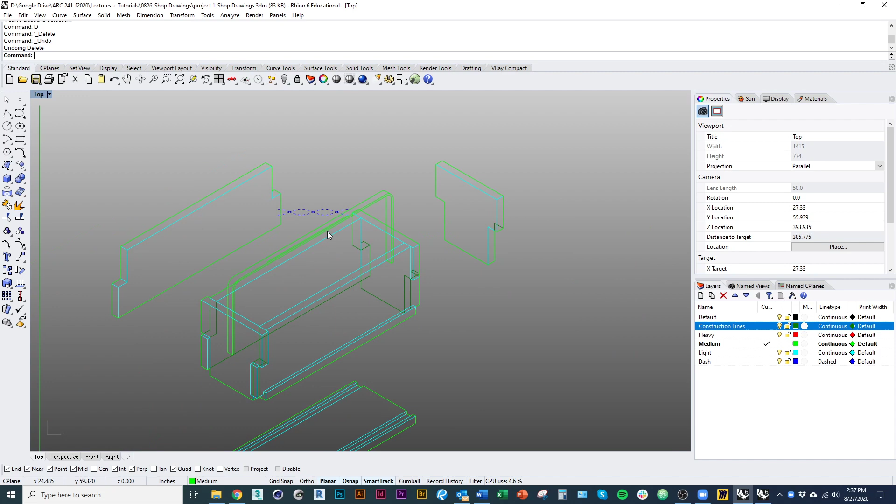This line is the center line of my handle, the center axis. That was the line I drew first, and then I offset everything. This central segment, this 8 inches right in the middle of the handle, is where our twist is, so that's where I need to apply this part of the drawing.

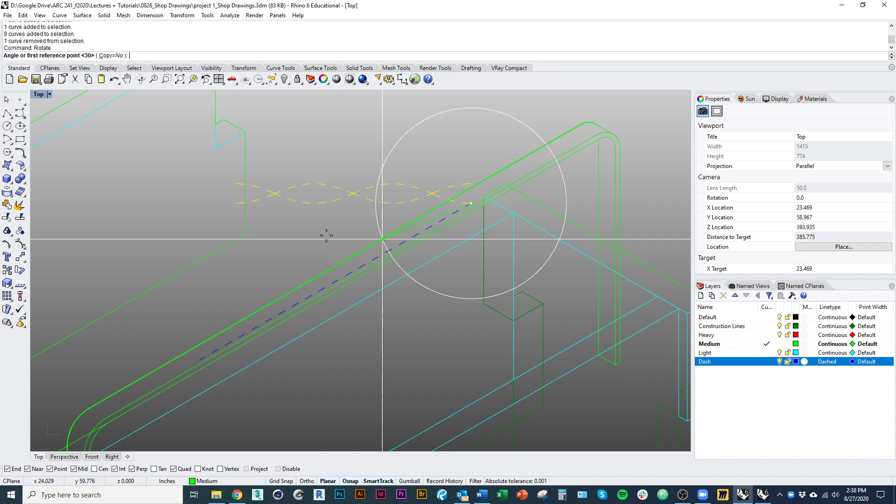So I copied it from our plan down below, and I want to move it up so it's snapped to the end of my axis, and then rotate it. I'm snapping the center point of rotation to the start point of the axis.

Shift, and I'll just rotate it so it's aligned to that axis. Now I'll select those two sets of lines and isolate them. The isolate command works like hide, except it hides everything except what you're selecting, so now we're just working on these two curves.

So what I want to do first is Scale1D again on this set of curves, and I'm going to line them up with my central axis.

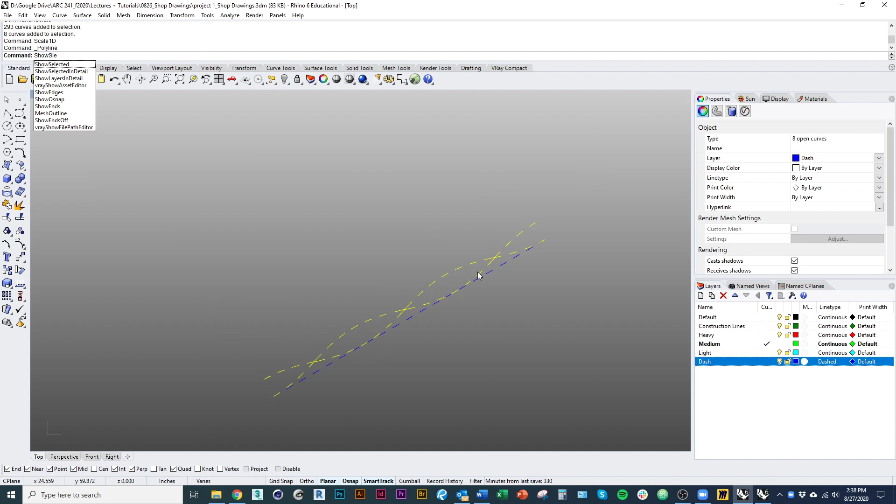Next I'm going to kind of shear it. Let me do show selected to bring back some of these lines here - those are the lines of my handle. You can see the angle of my axis is a little off from the angle of that line.

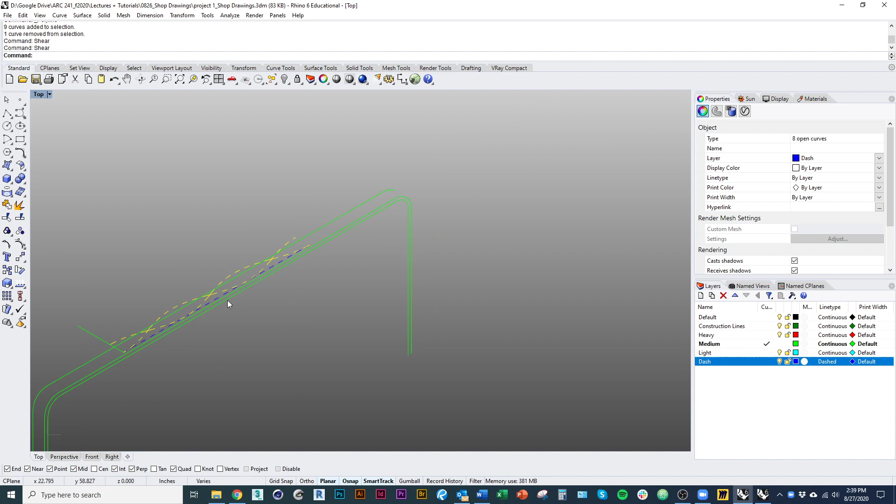So I'm going to use the shear command to line it up according to the isometric angle. I'll select those curves, type shear in the command line - oops, wrong point. We're going to snap to that corner, then drag it down to that construction line, which is at 30 degrees. Now it matches where it should fit within that handle, so I'll move it over within the handle.

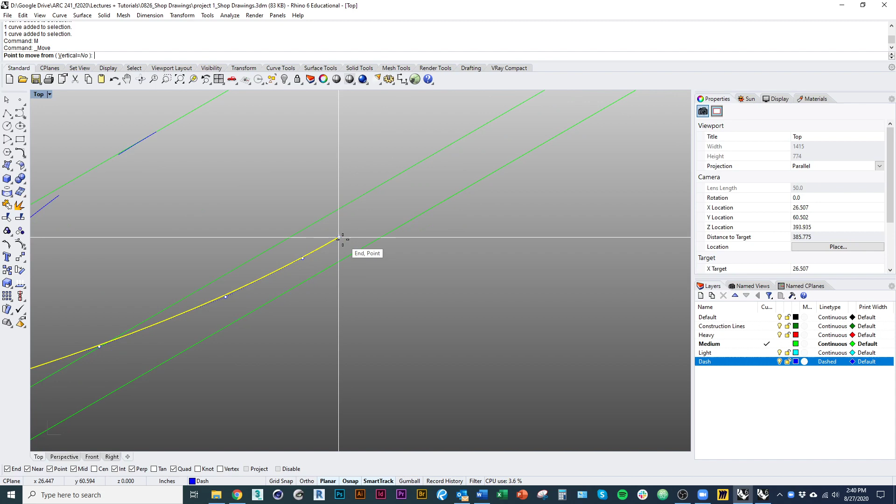And then I'm just going to move these lines. Actually, let me draw this out properly, kind of go like that. Okay, and then I'm just going to trim everything else.

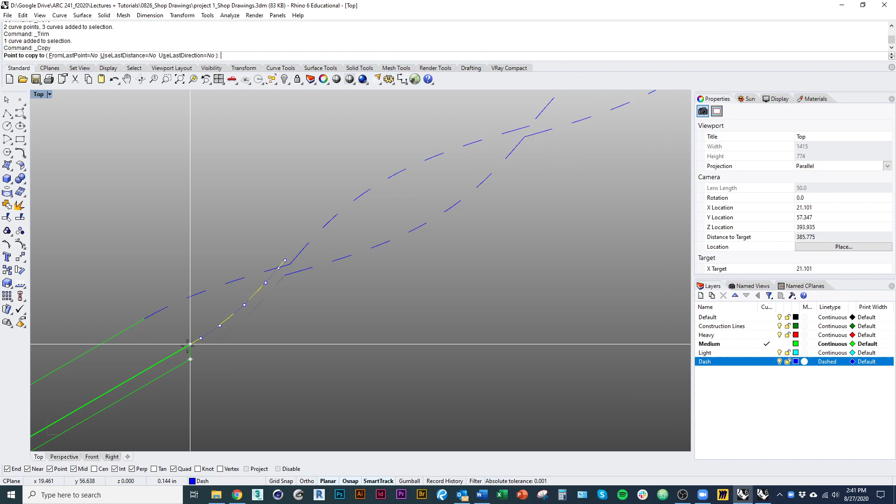Just like we did earlier. Oops, did that work? Good. Okay, and then I'm going to copy a couple of these lines here. Right, and that should be just about good enough for what we're doing now.

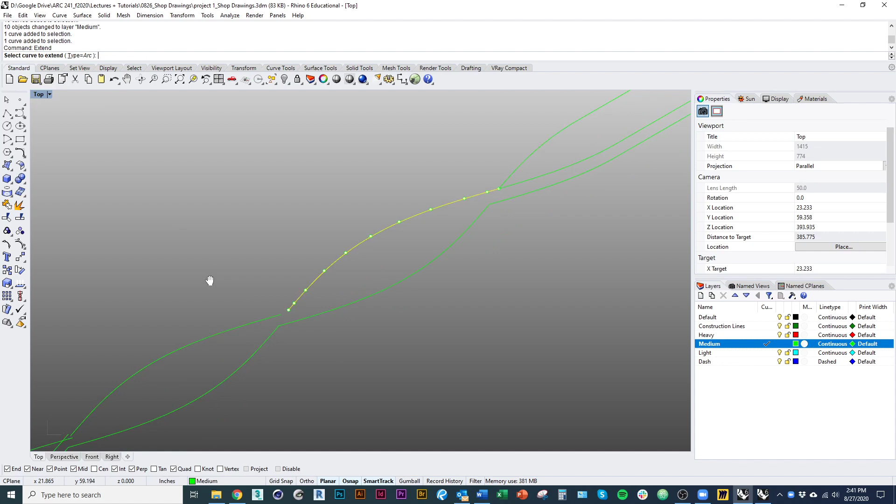And I could use the extend command and just make sure these guys are meeting each other. Okay, there we go. There's our handle.

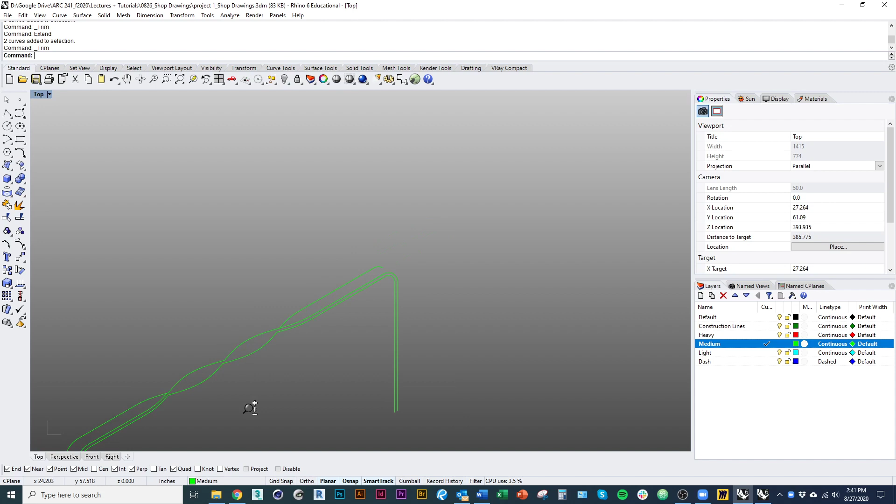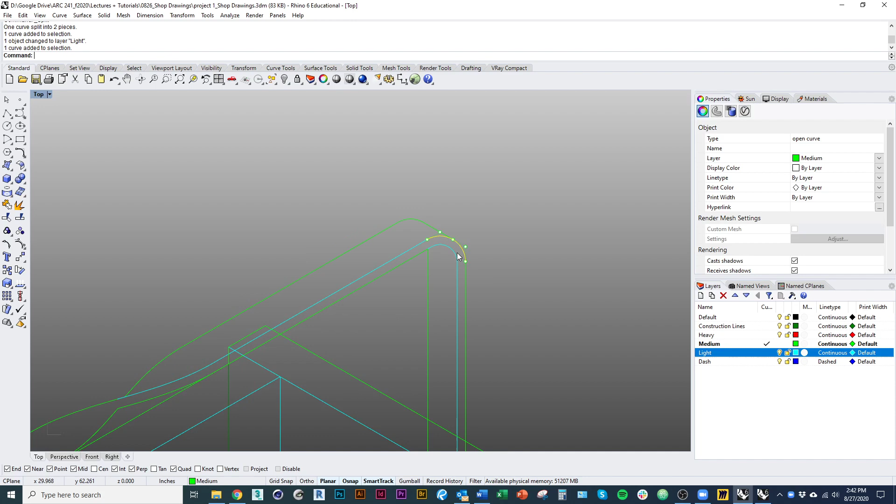And then what I'd also want to do here is adjust the line weight a little bit. We'll explode that, and put the lines that aren't forming the profile on our lighter line weight. Okay, so there we go.

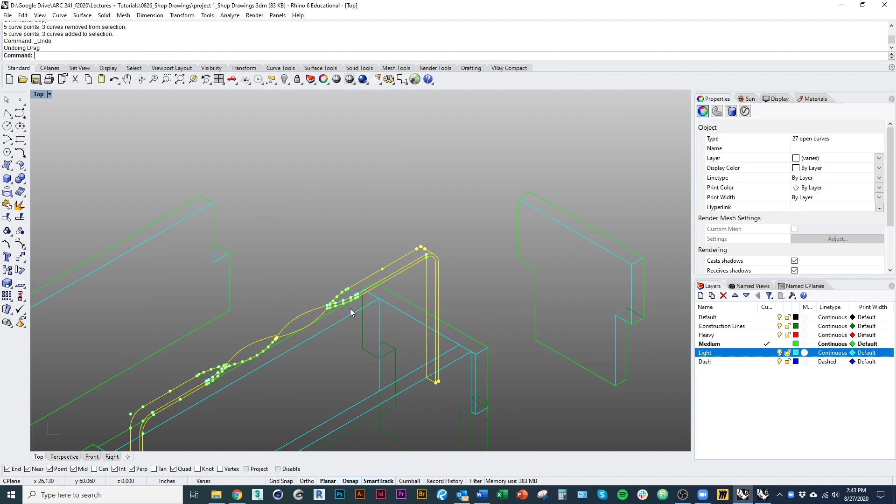And just like before, I'm also going to pull this part off, because I want to draw this separately. First, I'll use copy. Uh-oh. Stuff in there. Start over.

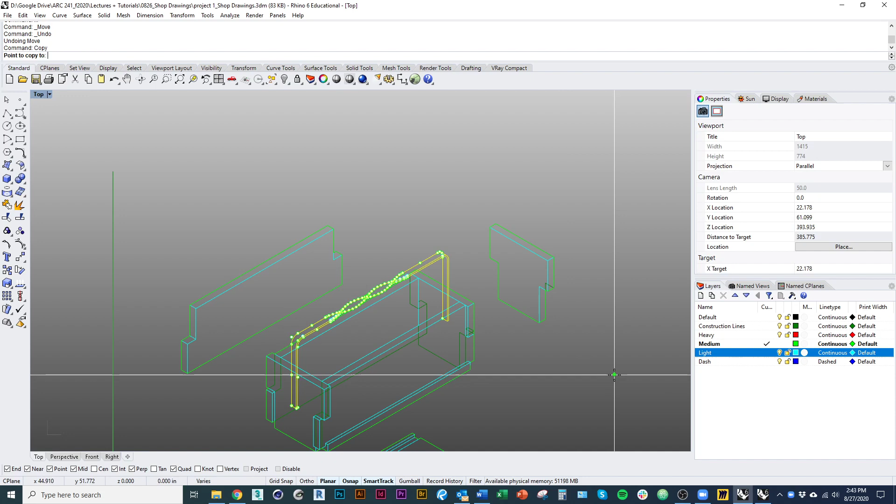Oops, sorry, let me copy it. Okay, let's put it right there. Cool. Now just the last little details here, trim out the stuff where we wouldn't see it. I should actually be locking my construction lines.

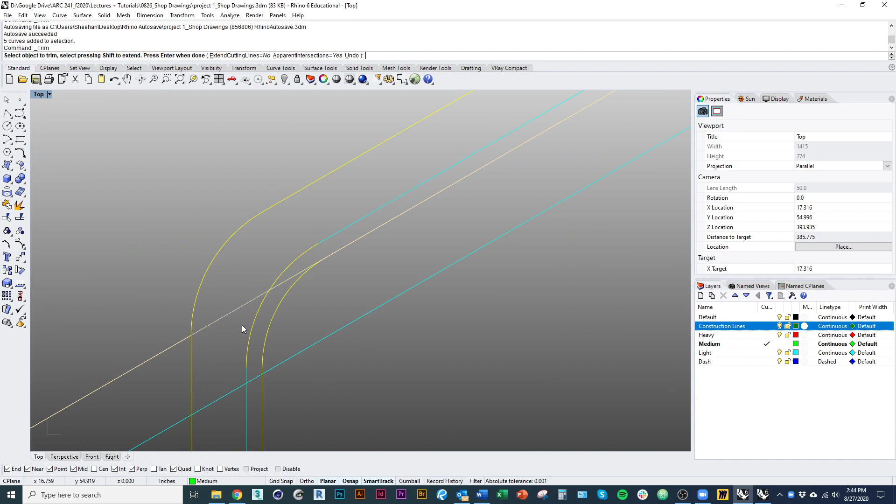That's kind of what our axonometric drawing should look like. I'll get more into composing that later when we do dimensioning and layout, but for now I'm going to move on to the section drawings and the cut sheet.

The cut sheet should be similar to this. These two drawings actually reference each other, the axon and the cut sheet. The cut sheet is each part drawn independently and shown with its own set of dimensions on its own, and we're just going to draw them in elevation.

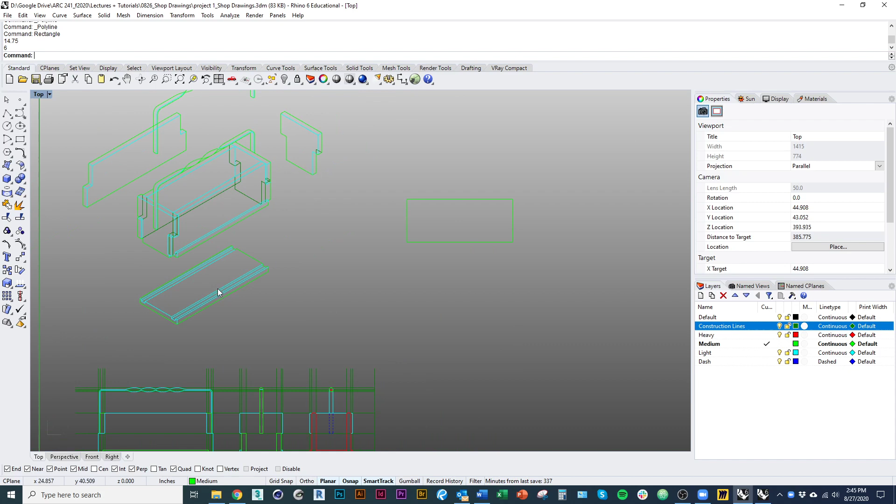So all I need to do is work one piece at a time here. That's 14 3/4 by 8 by 6, I believe. I'm going to work off to the right here. I'll just use the command rectangle and type in 14.75 by 6, and there's the bounding of the bottom, the base of the toolbox.

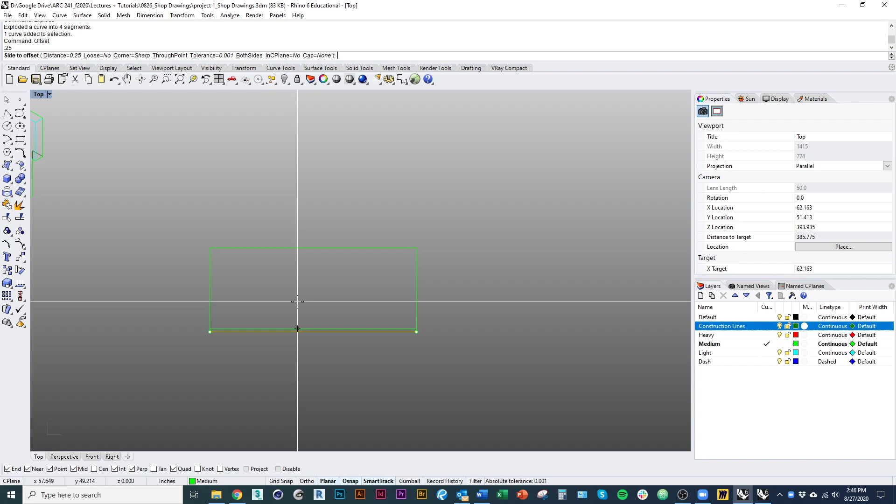I'm also going to quickly take off these dimensions, which I think are 1/4 and 5/8, because of the thickness. I'm going to explode this, and offset this line since we're looking at it from the top, directly on. 0.25, then offset that by 5/8, and mirror it across the center, making sure those are on a lighter line weight.

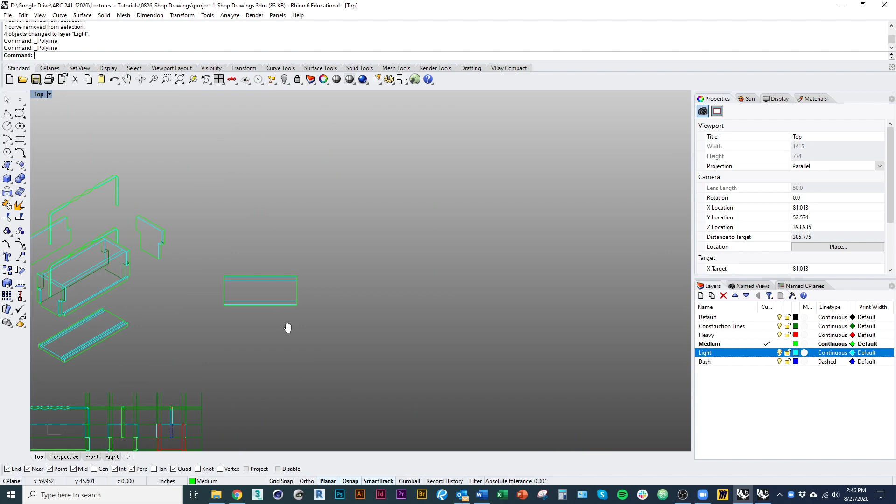To do these guys, I'll work the same way. I'm going to take the dimensions. So we're 6 by 6, and this little cutout is 7/8 by 3 1/4. I'll draw a rectangle, 6 by 6.

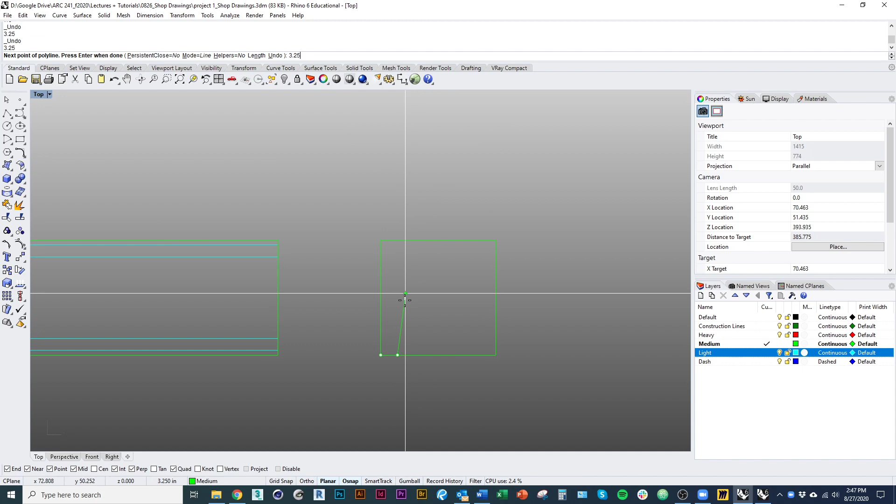And I'll go in 7/8. What did I say, 3 1/4? Smart Track's kind of getting in the way here. 3.25. Let me verify that dimension real quick. Yep, 3.25. Okay, and I'll mirror that.

Actually, I'm going to explode it quickly, delete that bottom line, and mirror that across the center. Now the other thing I want to draw on this is, and I'm drawing it from whatever face shows me the most information, I could have copied this to base that drawing on too, but what I need to also draw is where the dado is on that piece.

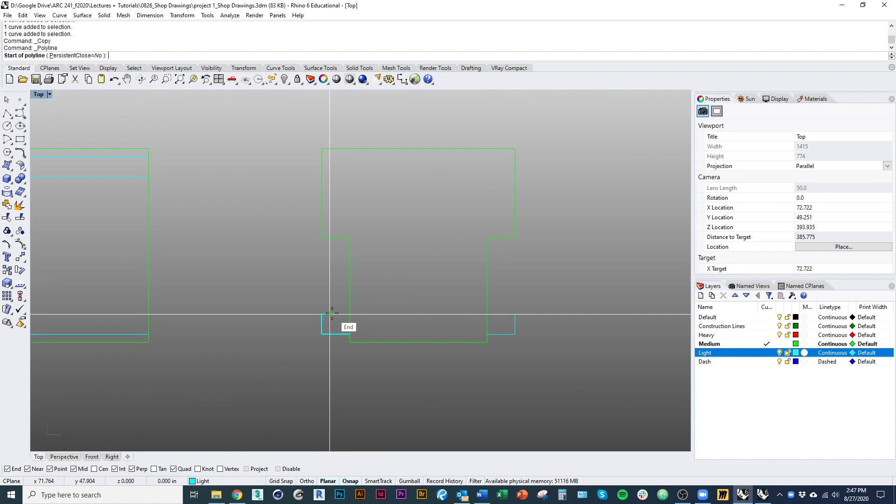I'm just going to copy these lines to give myself a reference for that. Got a lighter line weight, there's that part. And then the other sides, 14 1/4 on the inside.

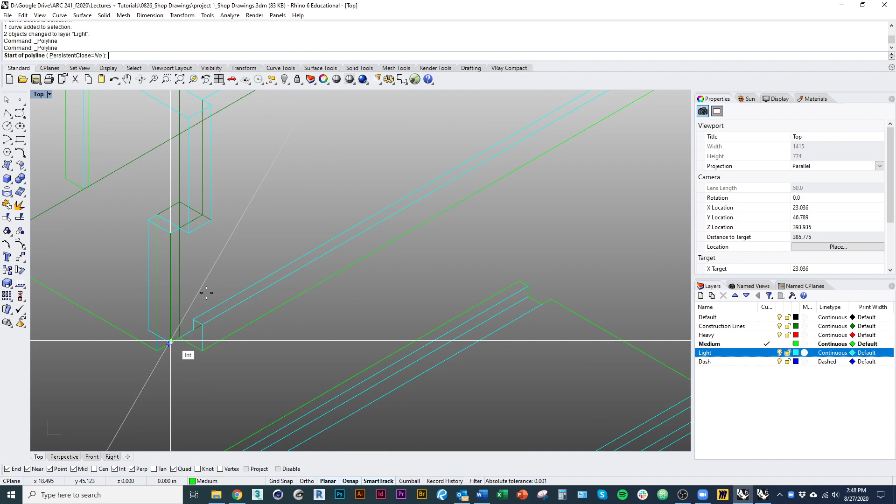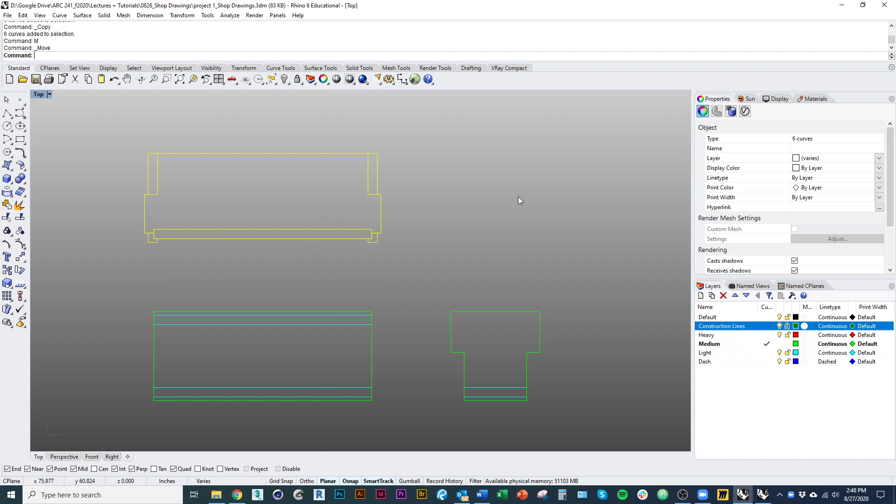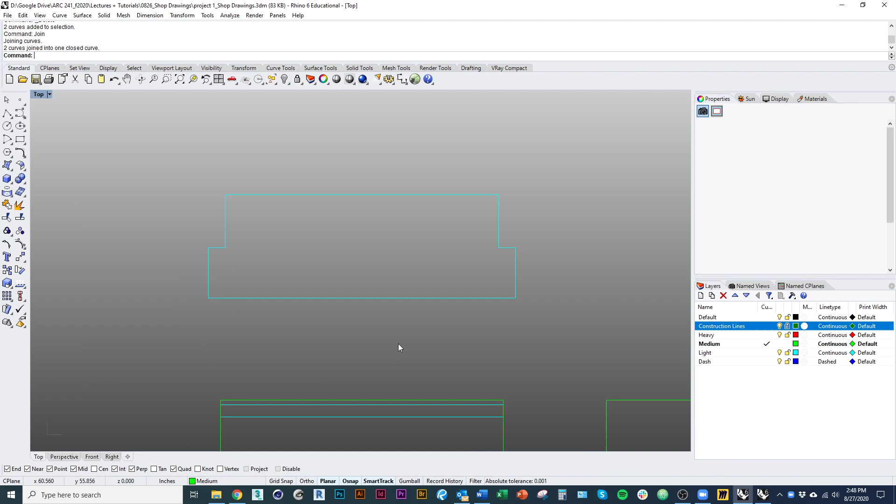What I really need to do is complete the outline and join all those curves together, and that should be a good outline for our long side.

Okay, and we could do the same for the handle. It is, of course, a part, and an important one, but it's going to actually just be the exact same as it would be in elevation, so we'll just copy that over here.

Later on we'll use this to set up our dimensions, and we'll set up a couple annotations to reference which part is which in 3D, which part is which in 2D, so we know how many of each part to fabricate.

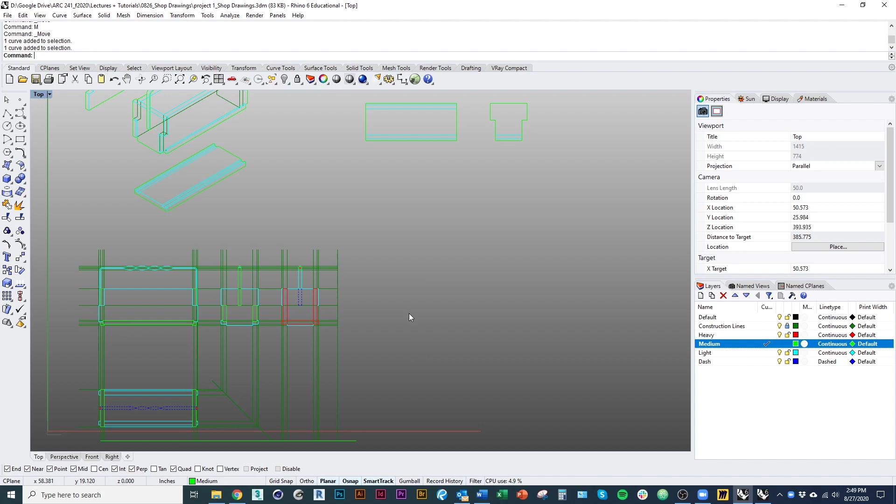In the next part of this video, we're going to do our detail drawings. So again, working from our assignment sheet, we have to do 3 detail drawings, connection details. So, and these are them.

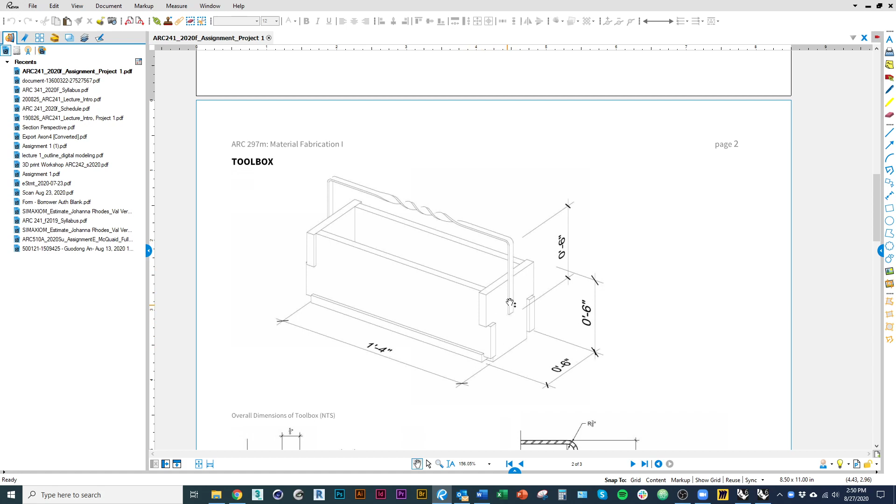We need to draw a typical dado connection, this kind of lap joint where these pieces intersect, and where the handle attaches to the short side of the box, which is those 3 drawings there. So what I'm going to do first is just draw them out, and I think I can base these on some of the drawings I've already done. I'll start with that.

I'm going to copy this guy, I just did that by tapping Alt and dragging it. Okay, so imagine we were cutting through, I don't know if you can see this, but imagine we were cutting through the center of that board, and so we'd be seeing this whole board cut through.

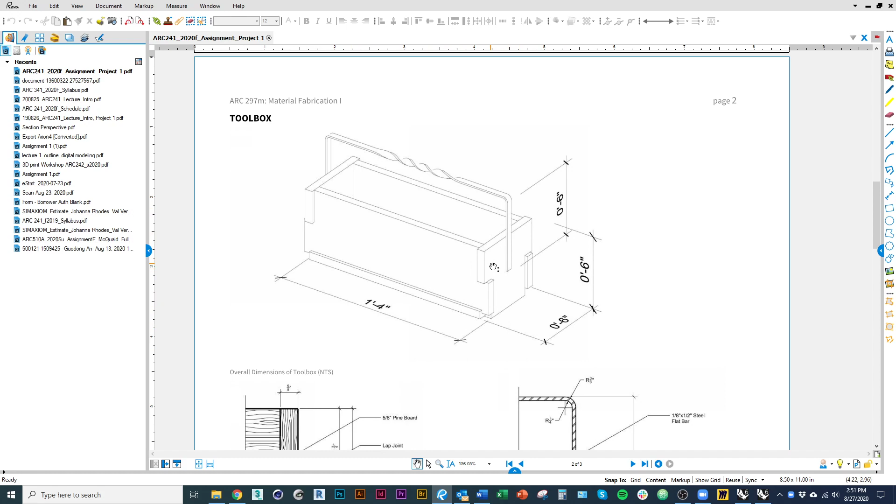We'd be seeing the base, and we'd be seeing the short direction, the short side. So what we need to do is redefine some of our lines. I'm going to get rid of the handle in this guy.

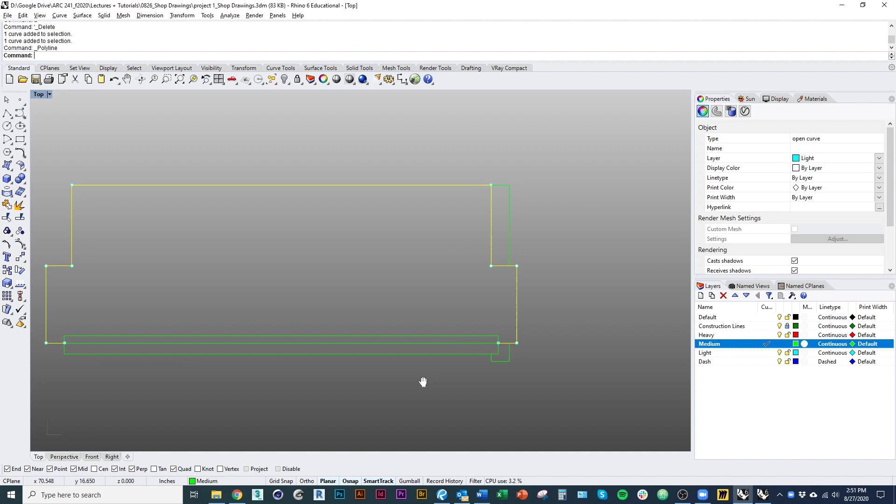And again, if we were cutting through the base, we actually wouldn't see this guy come all the way up. We would see the board that's going through it. So I'm going to go ahead and connect that line there. Okay, and I'm going to trim this stuff.

Okay, and so we also need to kind of lay this one out differently. I'm going to join that. I'm also going to change all these outlines to heavy because we are cutting through them, except for this little part of the side down here that comes down, because that's actually inside of where our section cut's going.

I'm going to keep that one on a lighter line weight. The other thing I want to do is clip away, just like on the assignment sheet, using one of these little lines with a dash in it, a little Z in it. I'm going to clip away the part of the drawing that really isn't important. Again, this is like a typical connection — the kind of drawing you do to say that's what it looks like at all four corners, right? All those dimensions are pretty much the same, so we're just going to draw it once and say this is that connection type.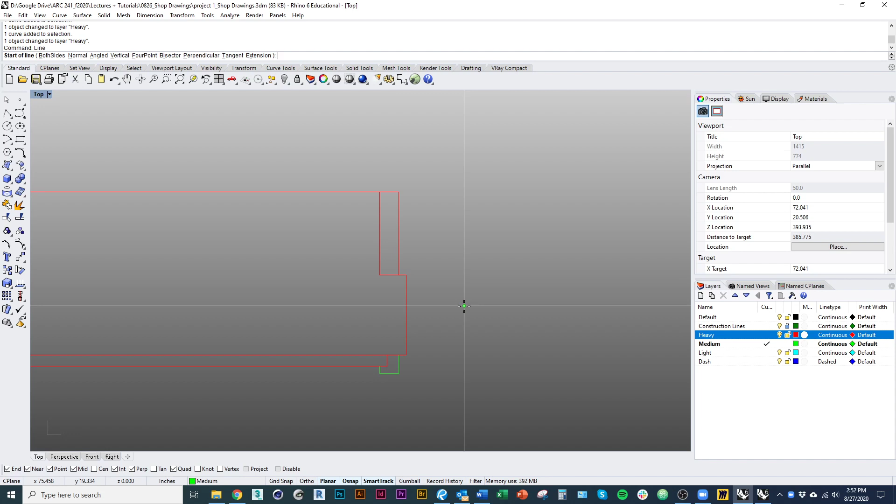So I'm going to start by drawing a line, from the top to the bottom here. Might scale that guy up a little bit. Okay, I'll draw another line — I generally just eyeball these, and then copy them around if I need to. I'm just drawing a line from the center. Let me redo that really quick so you can see it better.

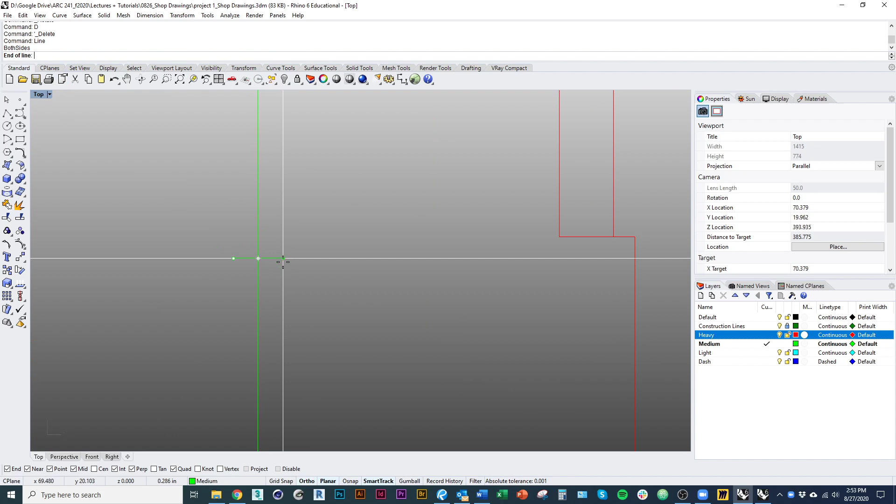So I drew a line, hit B for both sides, snap to the midpoint. Now you can see it's drawing out both sides. And again, like I said, I just eyeballed it. So I'll draw a line up 30 degrees, rotate that, copy it, and just trim it. There we go, there's our line. I'm going to put that on the lighter line weight, and use that to trim away the rest of the drawing.

Now the other thing we need to do is add hatches, because it's important in connection detail drawings to understand the differences between materials and pieces. So if you go on to D2L on our course site under content, under assignments and tutorials, under project 1, there's a file called hatches — that's a Rhino file. What you want to do is go ahead and download that. I'm also going to download the shop drawing title block, and I'll do that in the next tutorial, so I'll show it then.

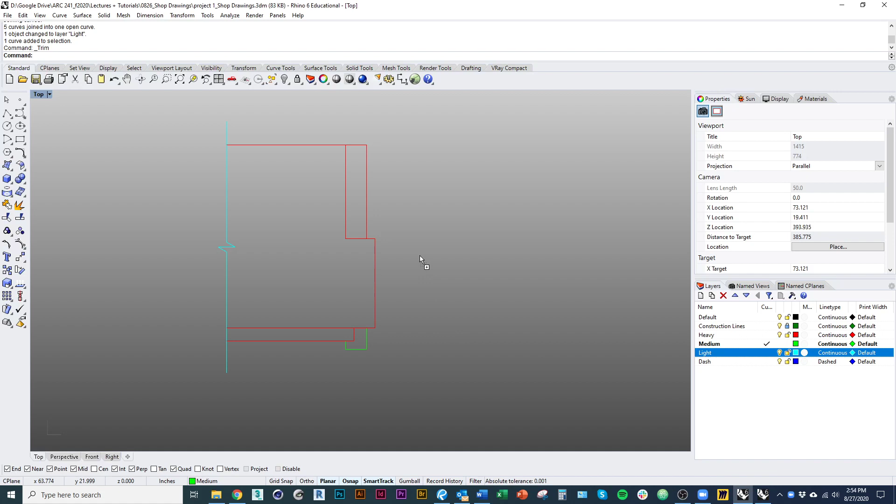So now we should have a Rhino file in our downloads. I'm going to drag it right into my window. And instead of opening it, I'm going to import it. Click OK — don't open it, because that'll close whatever you're working on. Just import it. So when we import it, you'll see I just got these couple little blocks of different hatches.

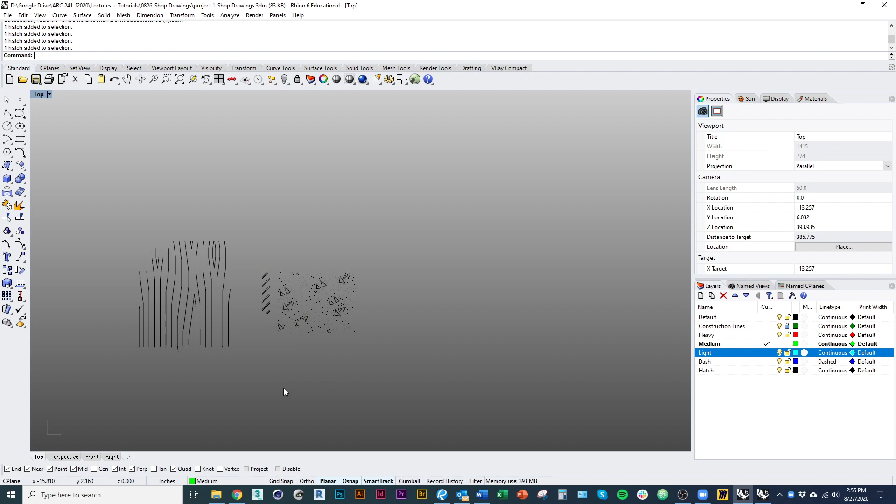This one's clearly wood. This one is what we use for steel. That one actually is already in Rhino, but it's labeled Hatch1. And this one is for concrete, and we're actually not going to use that one in this exercise, so we can go ahead and delete it. Actually, we can delete all of them, because once we've imported that file, the hatches are stored.

So what I need to do then is actually apply the hatches to the drawing I've just done. First of all, I'm going to make a new layer. I'm going to call it hatch. Oh, I guess I did that layer already. Whoops, okay, so I'm just going to make a different color for it.

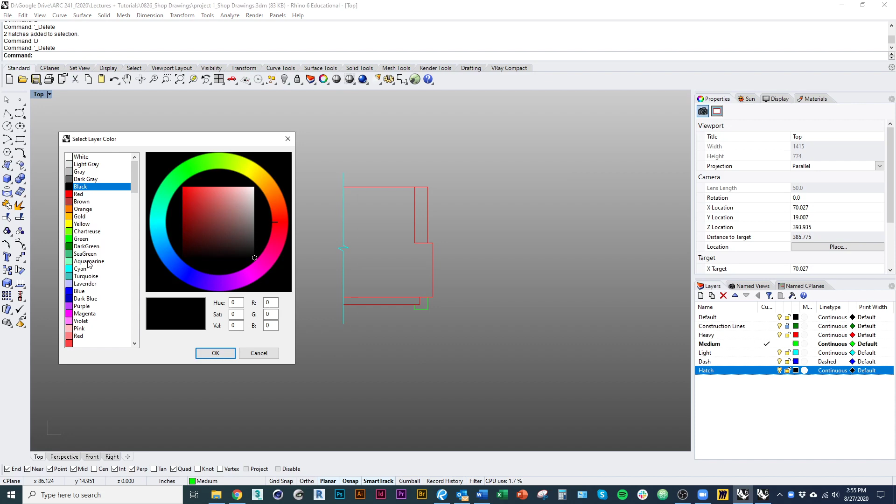Let's do something like that. Okay, we'll leave that alone for now. I'm going to set that as current.

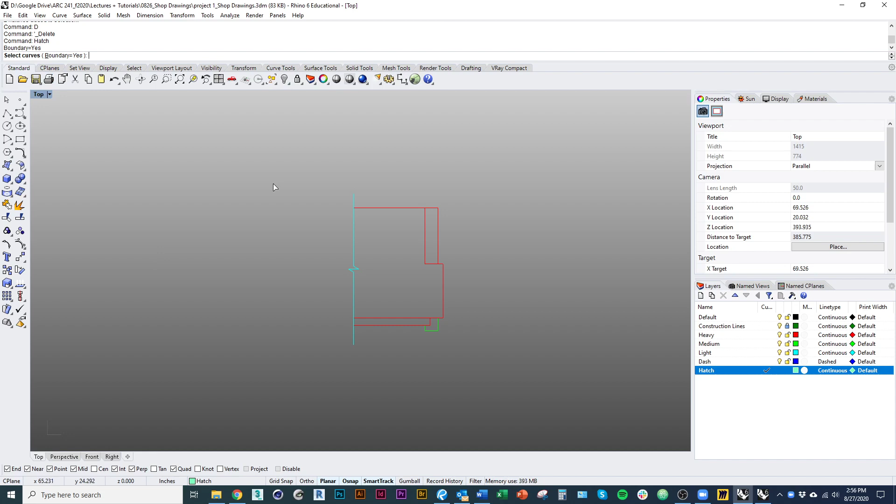Without selecting anything, I'll just type hatch into the command line. And this option here where it says boundary, I'm going to click that option. When I click that, it'll say select curves. So I'm going to select all these curves, and then I'll press enter.

What this allows me to do is kind of fill it, like with a paint bucket. So I can fill in whichever areas I want to hatch. For example, I'm going to hatch this one first.

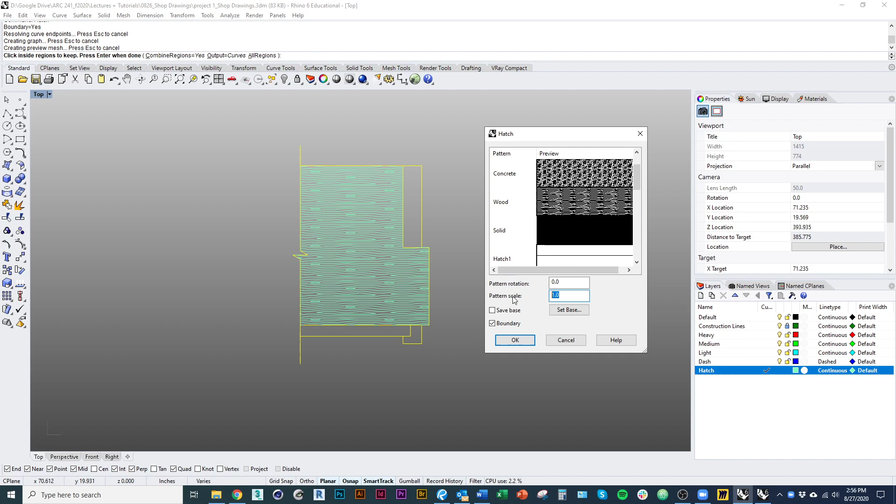And I'll go to my wood hatch. There's two options down here: I can change the rotation, and I can change the scale of it. I'll change it to like 3, a little bit closer. Then I'll do it again.

And so this time I'll fill this part. And again, this is a different piece, right? It's a different part of my model. So I'm going to distinguish those by applying a different scale so that they kind of read as separate.

And that's the reason that we do these all independently and not all at the same time. If we do them all at the same time, they'll just be joined into one hatch and we won't be able to set different properties for them.

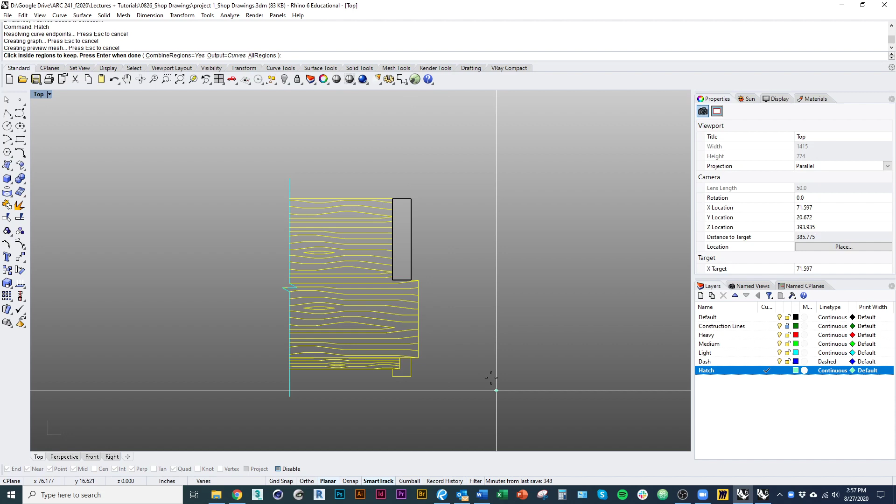So then I'll select all the lines one more time, go in there, the center. And this time I'm going to change the rotation because the grain orientation of that end piece is a little different. Now it would actually be the end grain that we'd be looking at, but obviously we can't match it with that. So I'll just change my rotation value to 90.

And so there it is, that's the end piece. And that's our first detail. The other one that we need to draw is the handle to the side. Let's start with that guy.

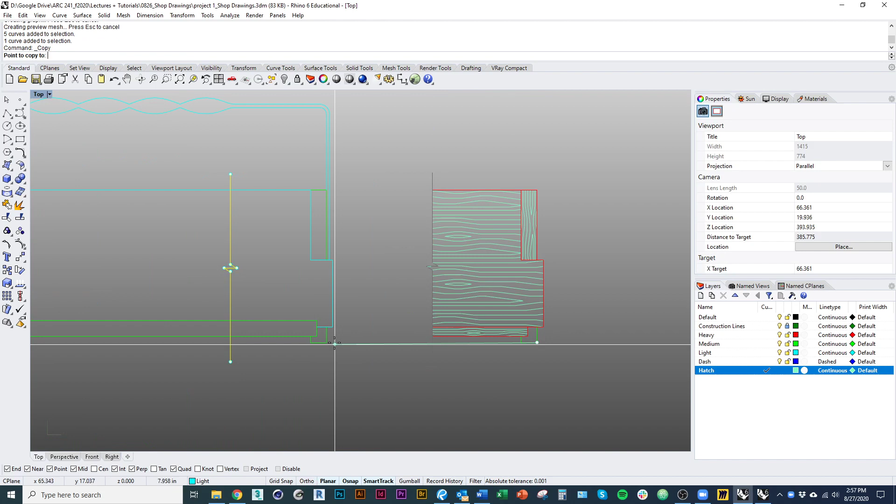Again, I'm just tapping Alt and holding Shift on the keyboard to move it in the right dimension. I'm going to copy this guy right away. And I'm actually going to move.

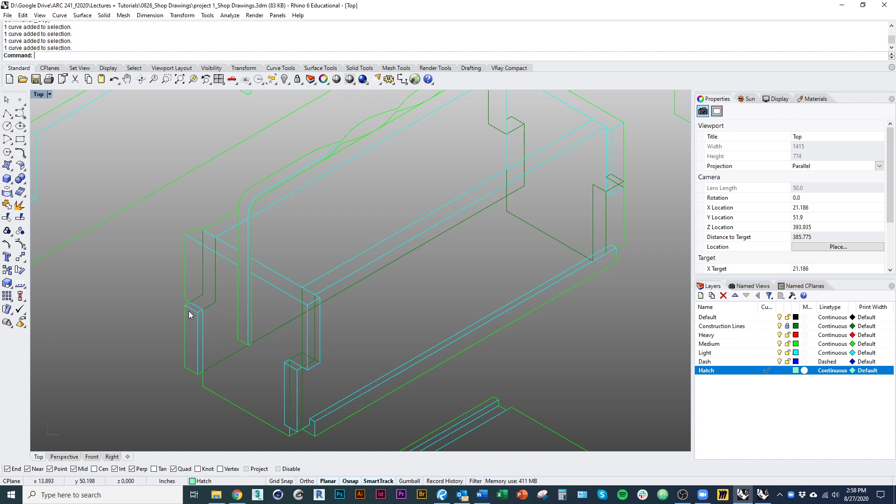So a couple things are happening here. One of them is we need to show where this thing terminates, kind of on that box. It actually terminates in line with this guy. The end of that handle is like aligned with the joint here.

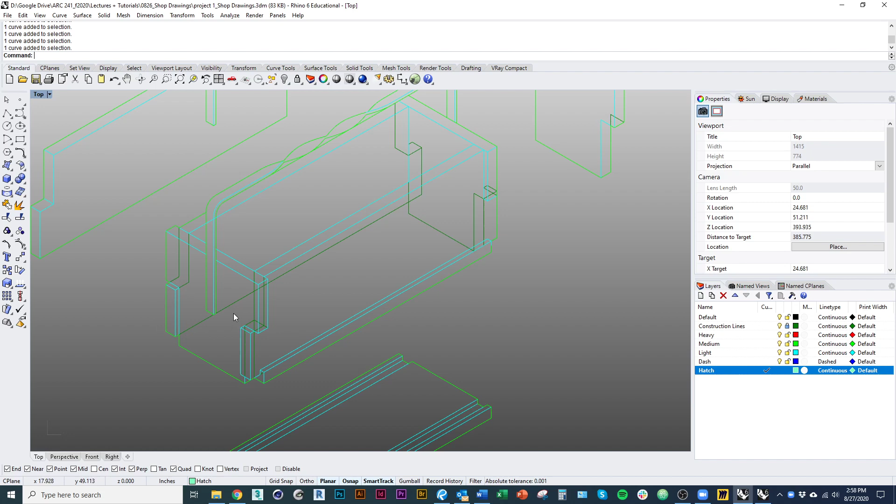But what we want to do is cut our object right through the middle of the handle. And so rather than seeing this kind of joint sticking out in the way of our view, it should actually be behind our view. So again, what I'll actually do here is I'll split this line with this line, not that line.

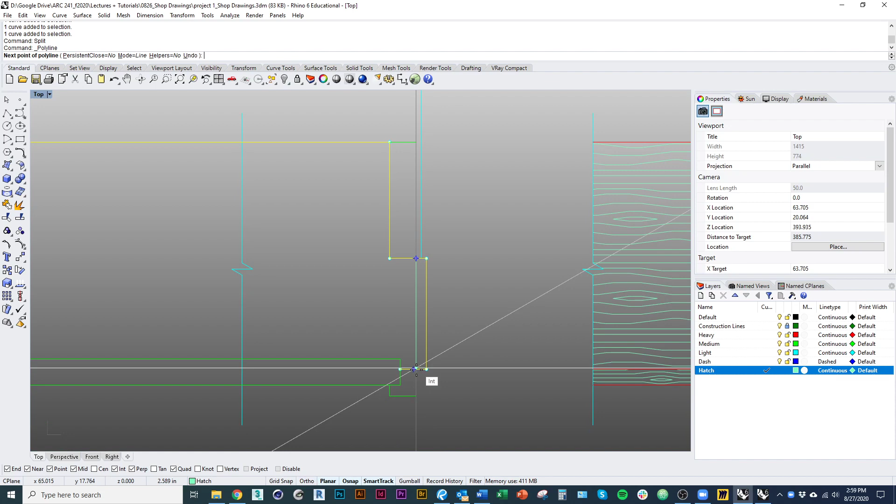I actually just want one line, so maybe I'll draw a new one. I just want to split it in one place, not a bunch of places. I'll draw a new line there. So I'll split it with that line.

Okay, so this is the part that's going to stick out that we'll see like behind the section cut. That's good. And then this part, I'm just going to explode it and delete those lines because we already have this outline.

Then I can go ahead and explode this guy. I'll remove that one line. So I just held Control on the keyboard and clicked it. Join. And get rid of that one line.

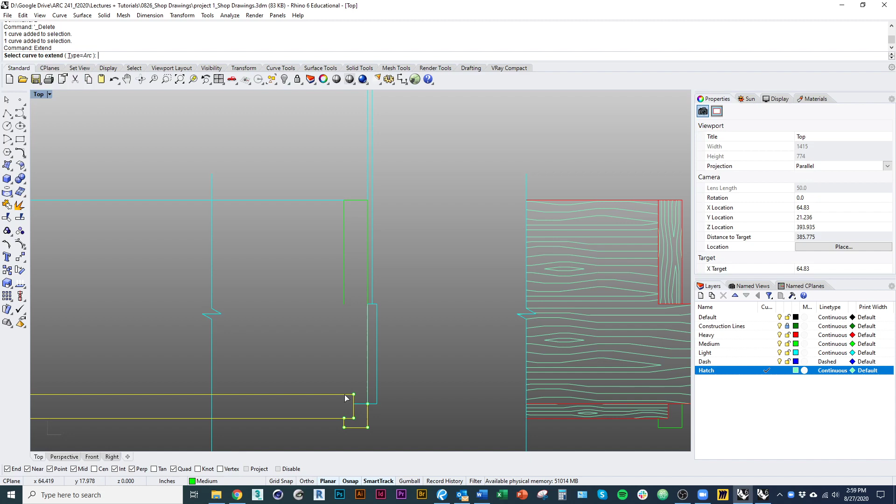And then I'm going to take this outline. I'll go with these two outlines, in fact. And I'll use the command extend again, and I'll just bring that line down.

Delete that line, the hatch line that's underneath. Okay, again, I'll delete that line. I don't need it. That's kind of what we would see if we were cutting through right here.

We'd see this board connecting to this base. We'd see the back edge of that long side, and we'd see the back edge of that part of the joint sticking out. So then I will.

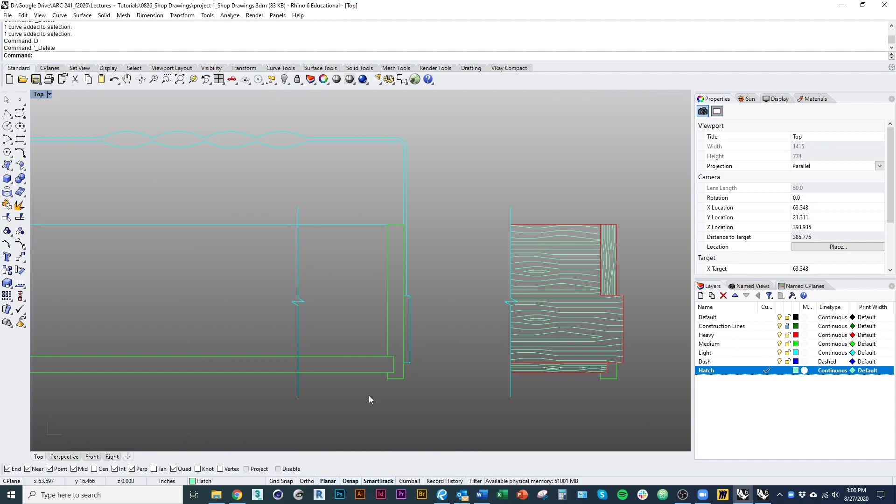I'm actually gonna make this guy heavier line weight. I'm gonna make these two a heavier line weight because I'm cutting through them. And I'm going to leave those guys as lighter line weights.

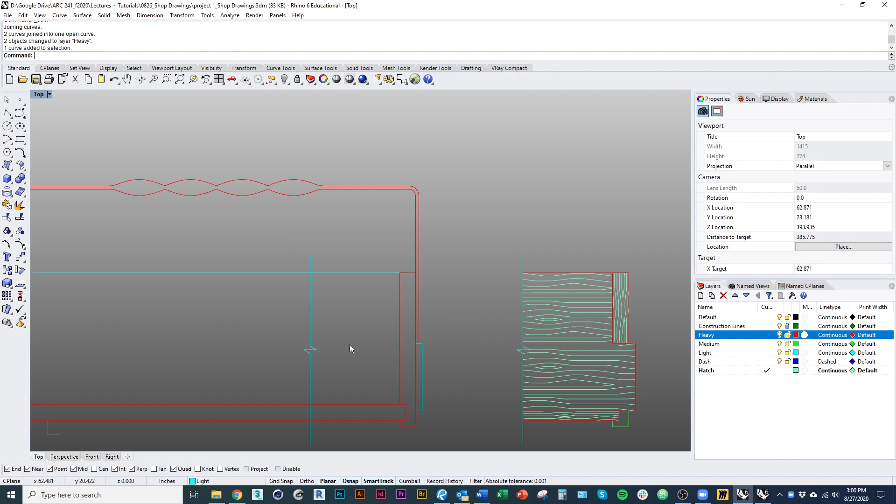And what I actually might also do here is I'm going to move this up. Yeah, actually, I'll just move it up a little more so it's not kind of in the way of that other line. And then I'm going to copy it, based on the center point, over here.

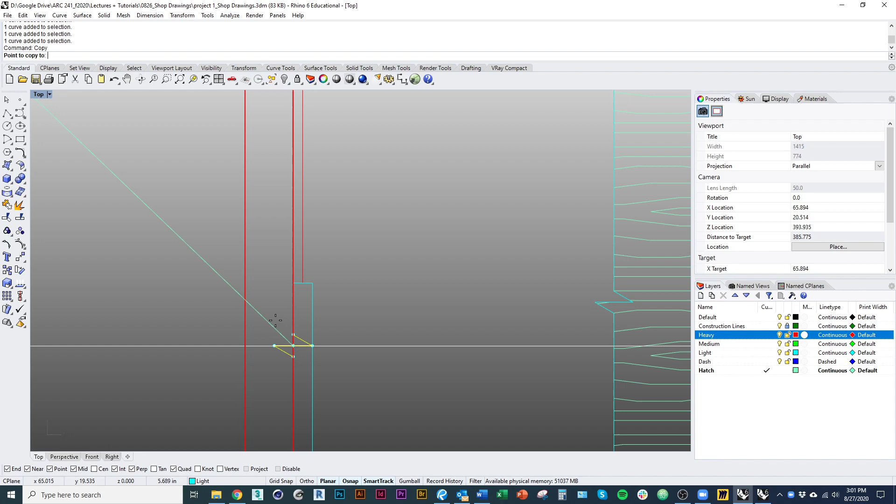I'll rotate it and move it down a little bit, positioning it so that little squiggle isn't in the way of anything. Then I'm going to trim everything else because I don't need to see this stuff—I'm just interested in the connection between that handle and the side of the box. I'll move this over a little bit, and this other stuff away. I'm also going to move these endpoints in scale 1D. Notice I just selected the endpoint, so I'm not messing up my squiggle.

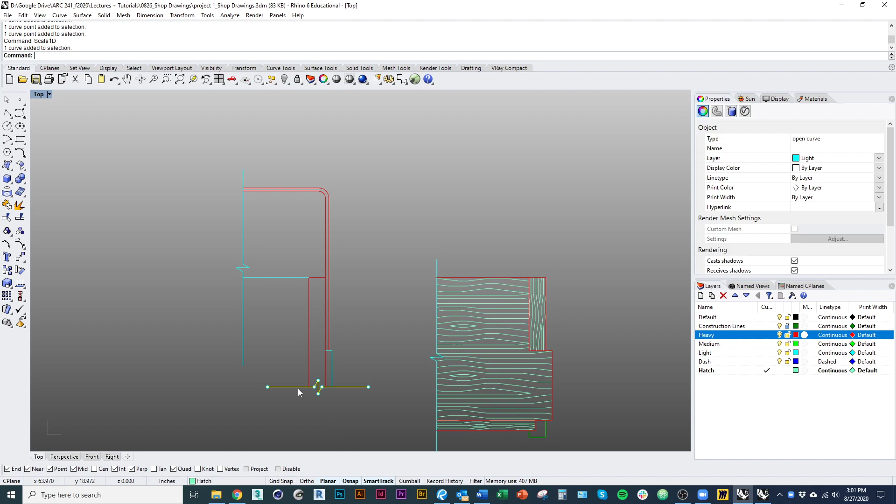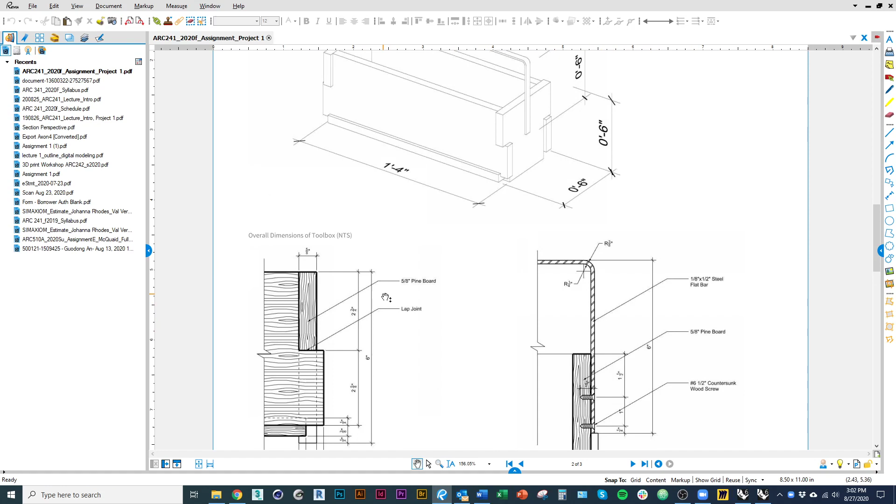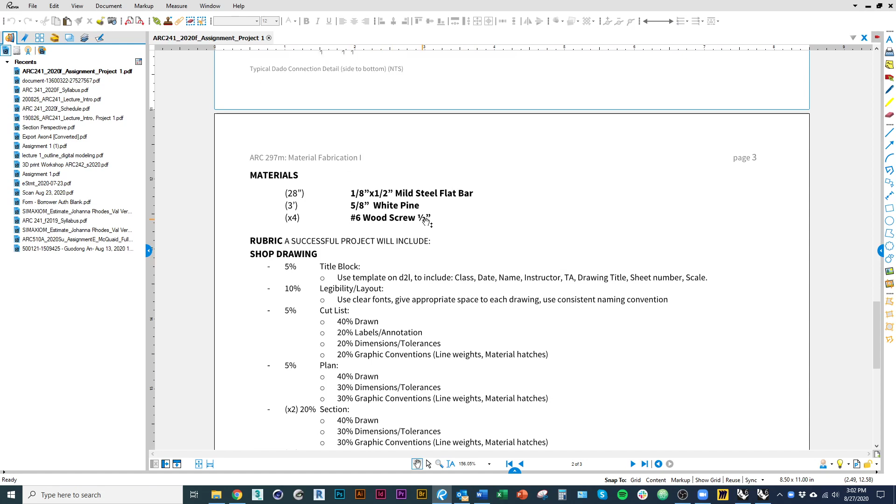Okay, perfect. So now we have the pieces we want to show cut through, but we also need to add some other details—this is connected to this board with a countersunk wood screw. That information is dictated not only here but also in our list of materials. It's a number 6, half-inch long wood screw, and there are 4 of them.

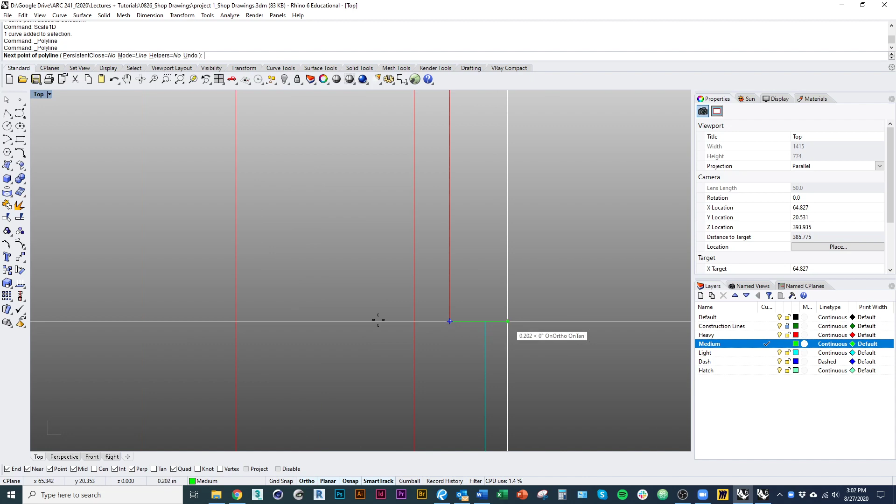We can just borrow the dimensions from here—so 1/4 inch up is the center of our screw, and 1 inch up is the center of the other. I'm going to draw a line for the center axis first. I'll change my layer. This screw is 1/2 inch long, and we know it's 1/4 inch up from the bottom, so I'll move it by 1/4 inch.

There we go. Before I get too much further, I'm going to draw the screw. A quick Google search for dimensions of a number 6 wood screw gives us the diameter of the head as 0.28, and the diameter of the threaded part as 0.138, which I'll round to 0.14.

So once again, I'm going to take this line, offset it, and choose both sides. Under distance, I'll type in the diameter of the threaded part, 0.14, divided by 2—because if we offset it to both sides, we'll have half the dimension on either side. Now when I measure this, I have a total of 0.14, exactly what I want.

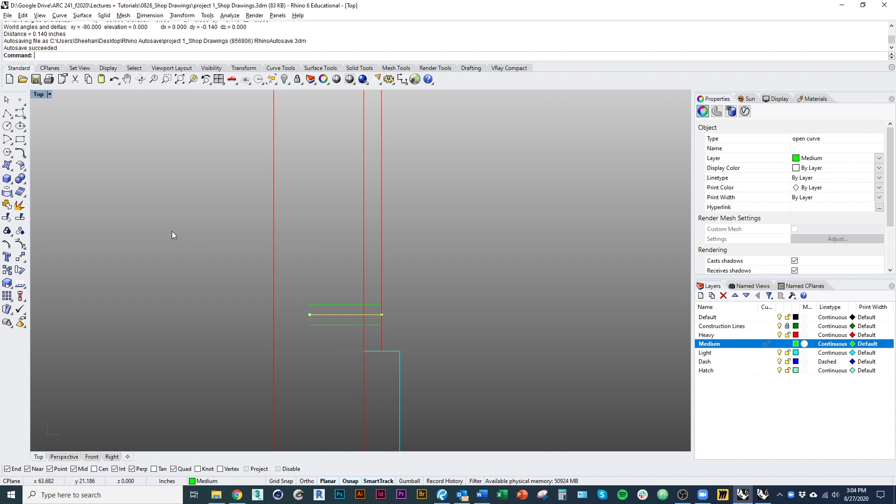I'll offset it one more time, again both sides, so I'll just hit B and enter. Then I'll type in 0.28 divided by 2. There we go.

Now I'm going to draw from that line down to there, and from that line up here. This may actually not be touching, because I rounded it—but they are touching. If they weren't, we'd use the totally accurate dimensions.

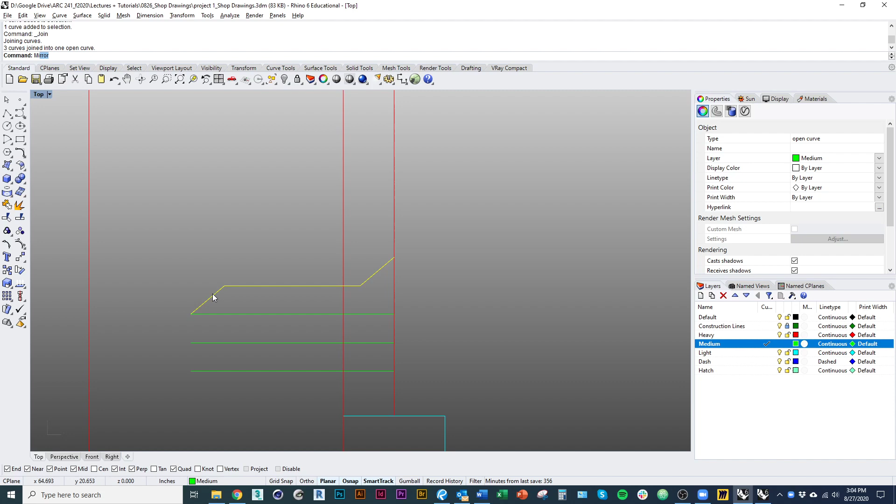We could just scale that line up, and then easily trim it—these lines would be trimmed against each other, this line would go away, and we'll trim this, join those lines, and mirror them across the center axis. I'll delete the rest of these other lines. There we go, so there's the outline of our screw.

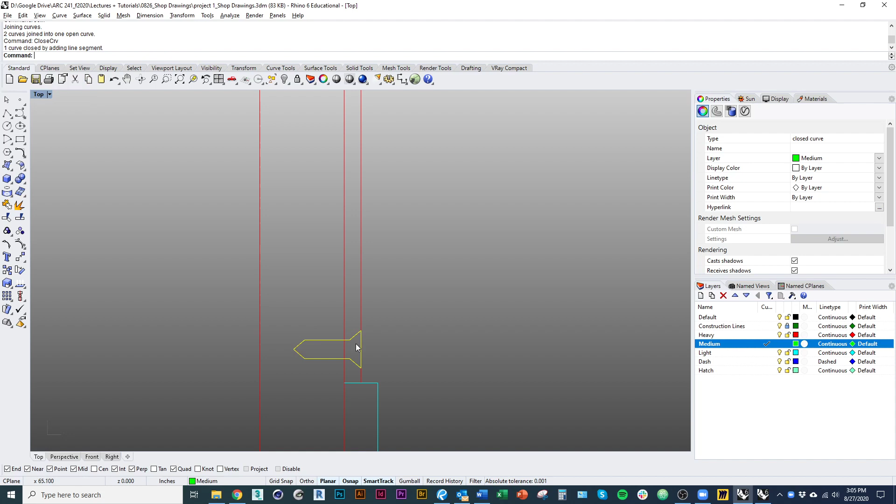It should be positioned correctly, and I'm going to join these two halves—just type in join. I'm also going to type in close curve, abbreviated CRV, close curve, press enter. That just adds a line closing the two open endpoints of our outline.

The other screw is going to be 1 inch up from there, so I'll just copy it—doesn't matter where I start as long as I move it 1 inch. I'll hold shift to snap to ortho, and there we have it—those are the screws, kind of positioned.

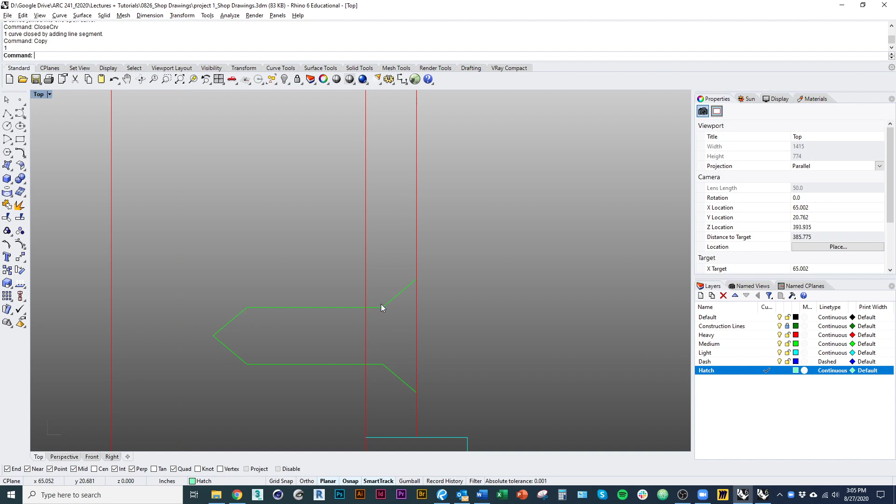The other thing I wanted to show you is how I did that thread—it's not based on any precise dimension. I just drew a diagonal line here, and then used the command array, which allows you to repeat something in any direction in Rhino. For example, in the x-axis, which is horizontal in my current viewport, I wanted to repeat it along the length of this screw.

So I'm going to type in more than I need—20. I don't want to repeat it in the y-axis or the z-axis, so I'll just leave those at 1, which is the default.

Okay, and then it's going to ask me what spacing I want, so I'm just going to click in the viewport and eyeball it. I'll do something like that. Pretty good. It'll say enter to accept.

At this point, I could click on this guy again and change the spacing. I could click on this guy and add more lines or remove some if I had too many. So I think I'm good.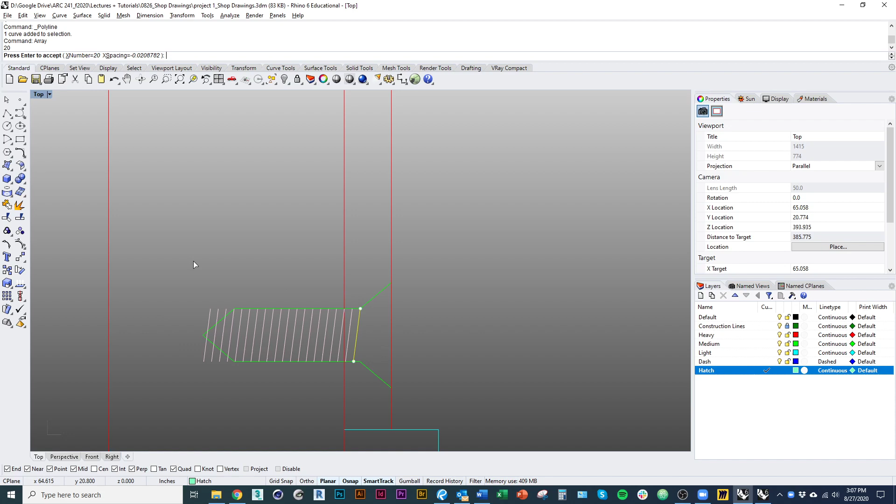I'll just press enter. I'm going to delete all these ones down at the end because we wouldn't really see that on the screw. And these guys are all within the outline, but I could trim them if they weren't. Okay, so there's my kind of screw hatch.

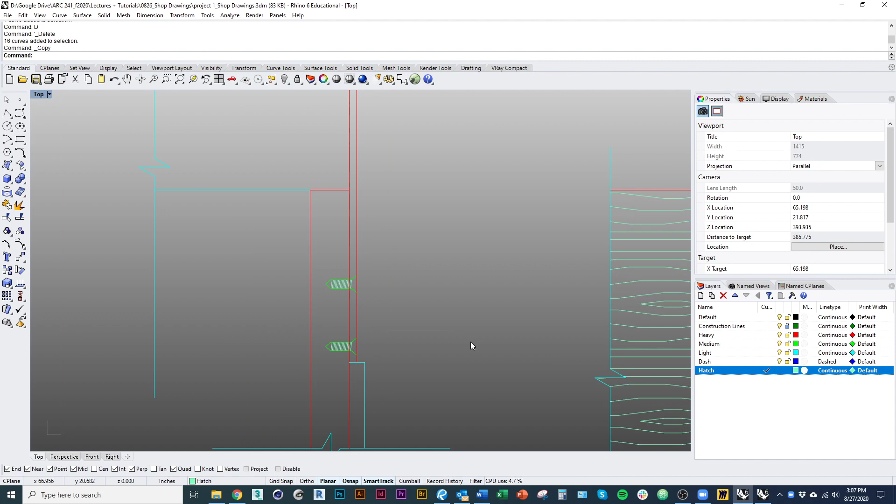Again, that's just kind of a rough estimate, rough kind of dimensioning to illustrate that that's a screw connection.

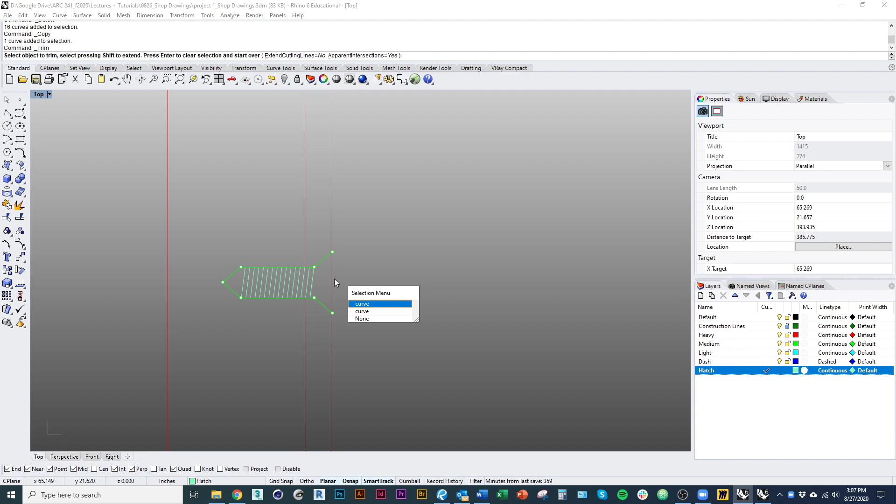Okay, and then I'm ready to, well first of all, I'm going to trim away what I don't want to see. So I'm going to trim away that line, double line there. I'll do the same down here.

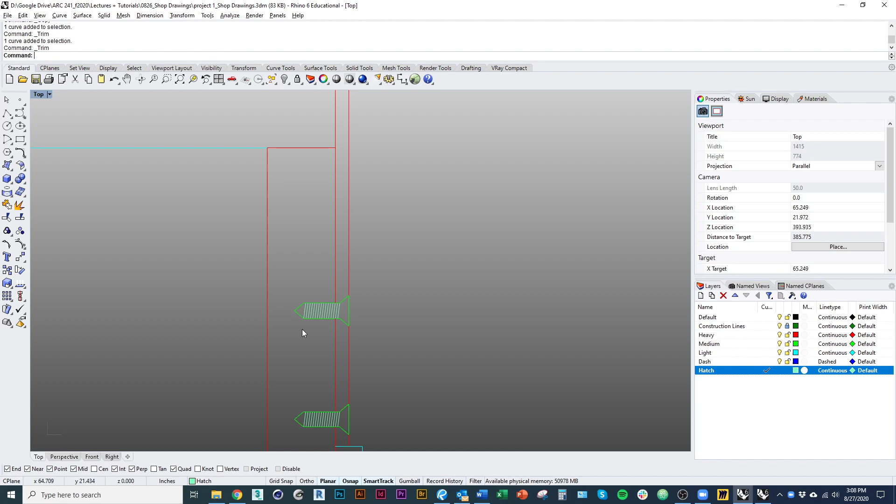That way it's like we would actually build this, by drilling a hole in the steel and then countersinking that hole. We'd also drill into the wood by drilling a pilot hole and then screwing in. So we'd see it kind of look like this. We wouldn't see that edge, right? Because these materials have been drilled or we're cutting through.

So we're gonna then go ahead and hatch. I'll start with just the wood part, and I'll select all the lines and click right in where we want to hatch it. That's exactly the same as we used before for this piece. So I'll just click OK.

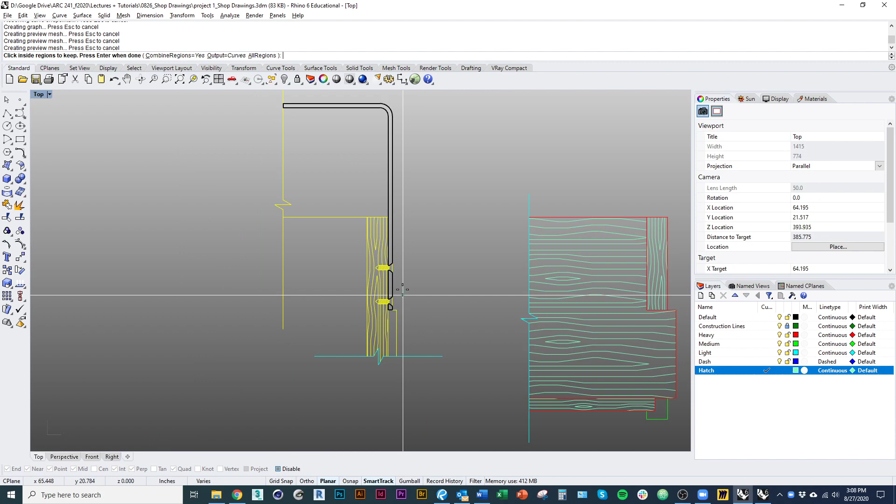And then we also want to hatch the steel part. So I'll select all the lines that bound the handle. I'm going to select all the outlines, all the areas that I want to hatch, right? Because we're also cutting through that steel handle down here in these spots. So I'll select those 3 areas and press enter.

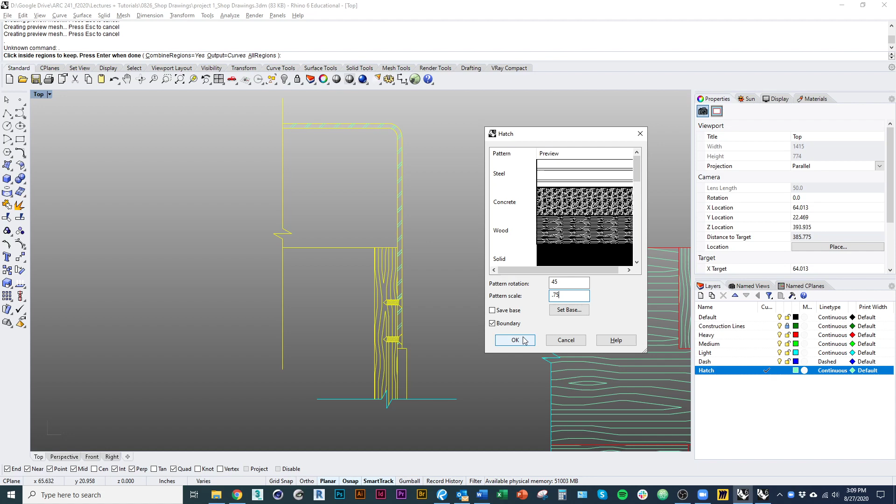I'm going to select my steel. A couple of things: I'm going to change the rotation to 45, that way we can see it all the way through. And I'm also going to lower the scale a bit here. I'll try .75 - pretty good. And I'll click OK.

There we go, there's our hatches applied. These are all the drawing, actually - oh, I'm sorry, no, not true. I need one more detail, which is our dado.

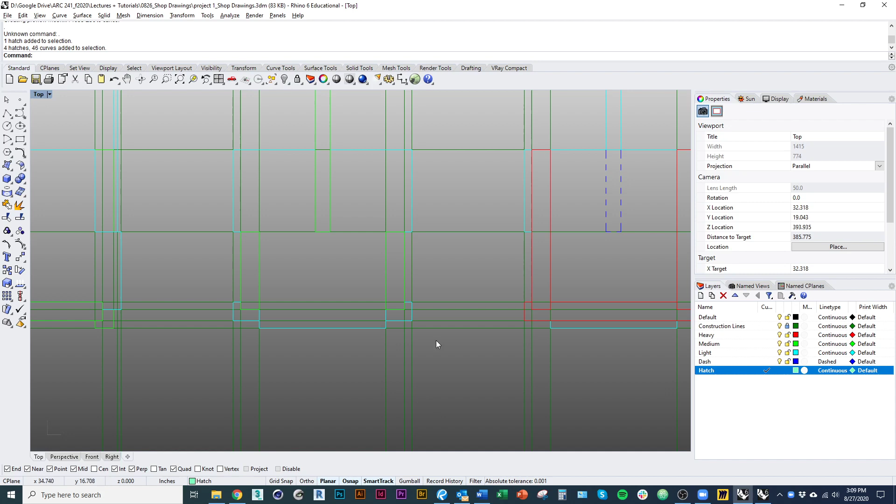Draw that detail really quick. I'll do the same as earlier - I will copy my elevation. Or actually, you know what, better off to copy my section. That already shows exactly what I want to show.

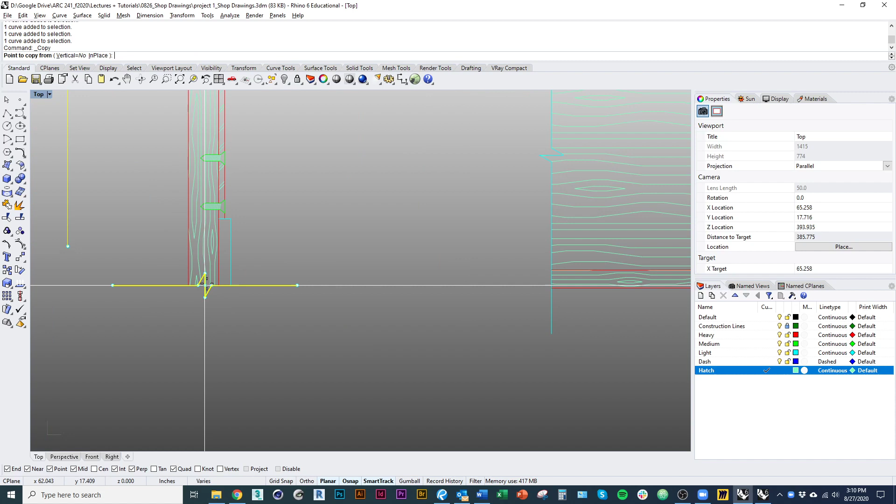Again, the reason you would show this is because detail drawings are going to be more zoomed in. They're going to contain a different kind of information, right? And we're also going to be cropping our detail to just show areas that it makes sense to show.

So because this is a detail that occurs in a few places, this dado joint, I'm just going to draw it once, and also because the dimensions are all the same. If I had different dimensions for all these, I'd want to make sure I drew separate details.

Let's see, 1.9, so I'll do the same. I'll scale down this little squiggle line. 1.9, so it's about the same as the other one. Balance those out a little bit.

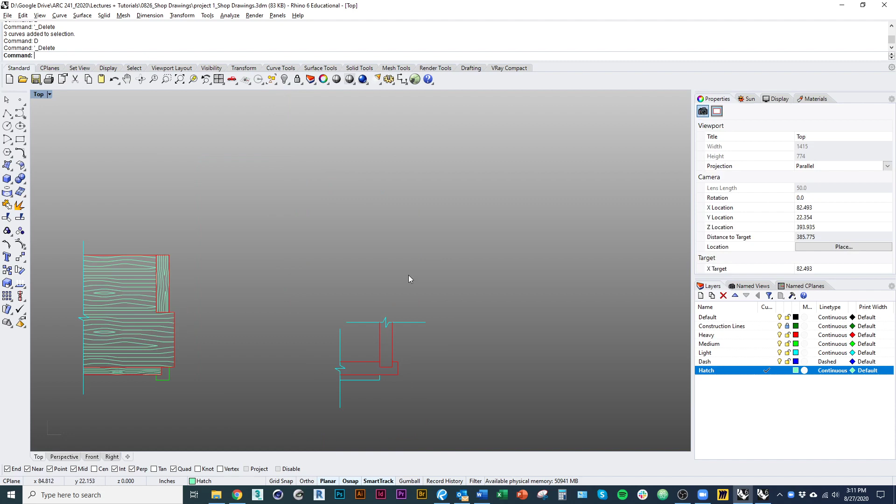All right, I'll trim away everything I don't want, delete everything that's outside of that outline. Okay, great, so that's all we really see in this drawing. And we've already got the lines outlined with the right line weights. All I need to do is add my hatches.

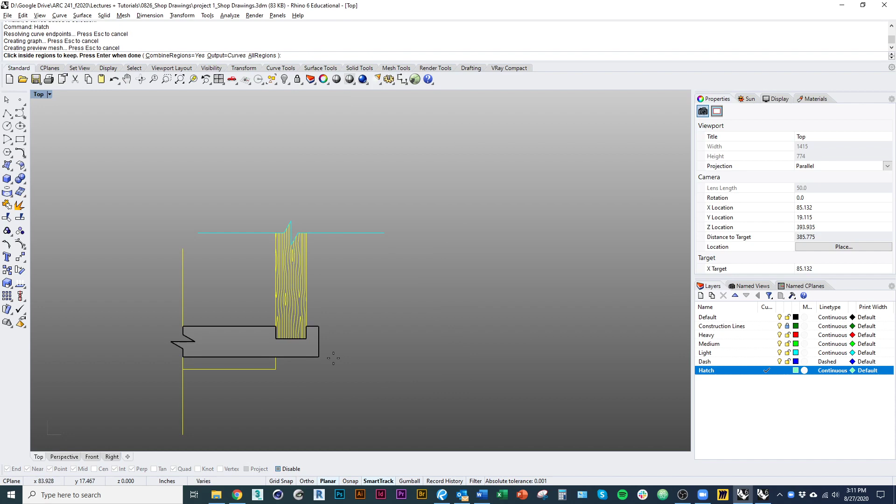We'll go wood, 90 degrees. Same down here, except at 0 degrees. There we go, that's our detail.

Pretty simple. Okay, so that's going to round off this video. The next and final video will cover adding dimensions and putting everything into a layout. So I'll go ahead and end it here.